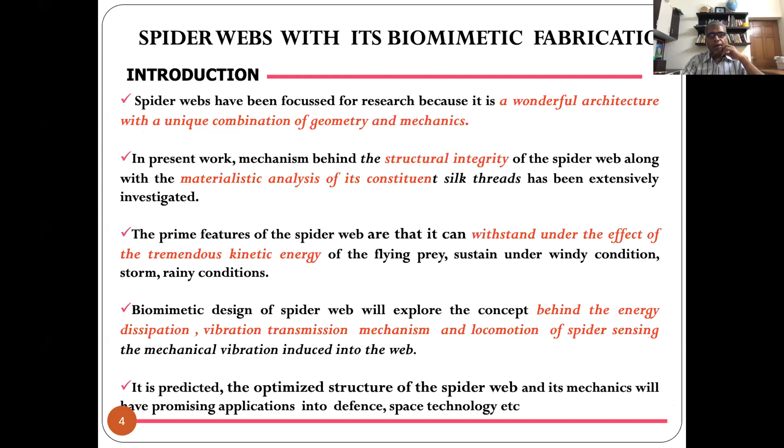It's very difficult to do through a machining process, or if we want to do it by some mechanical instrumentation. So that's the learning which we should have.

It seems that it is not very durable, but it is durable. If you see, in stormy conditions it survives, and even at high humidity it survives. It has some specific property - that's how it does it.

So what we have done is we do very simple experiments. We have taken the spider web on a glass sheet, and once you bring this glass sheet near the web, it automatically attaches because it has adhesive nature. Then you bring it to the lab and do some experimentation.

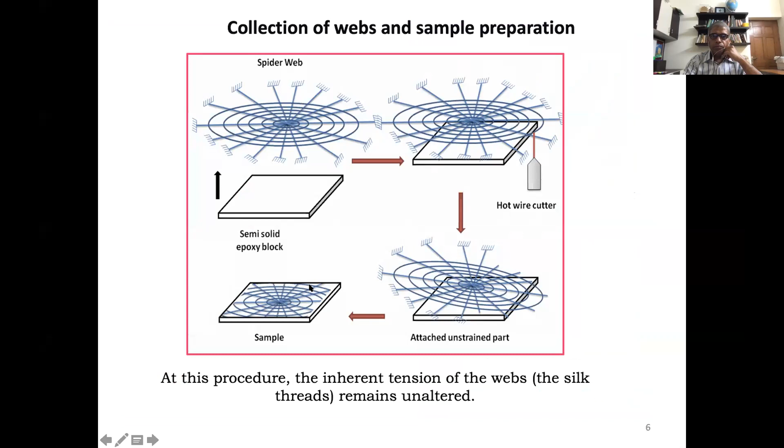Coming to what we have done next - this is a beautiful web that came up near our lab. We took our instrumentation there and tried to see how the characteristics of this web are sustained under windy conditions and extreme storms. So we put a laser spot on it - we have a laser vibrometer, which lets you measure the vibration of any structure using laser spots.

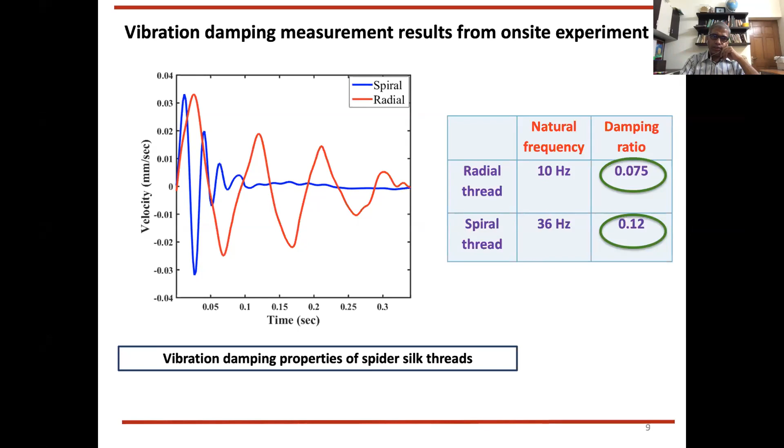When the insect strikes, it generally strikes this area on the spiral thread, because spiral threads are larger in number than the radial thread. So the spiral thread has higher damping but low strength, whereas the radial thread has higher strength but low damping. When the insect strikes on the web, it generally strikes the spiral thread because they are more in number, so the stretching or damping capability of the spiral thread needs to be high, and that's what came out from the experiment.

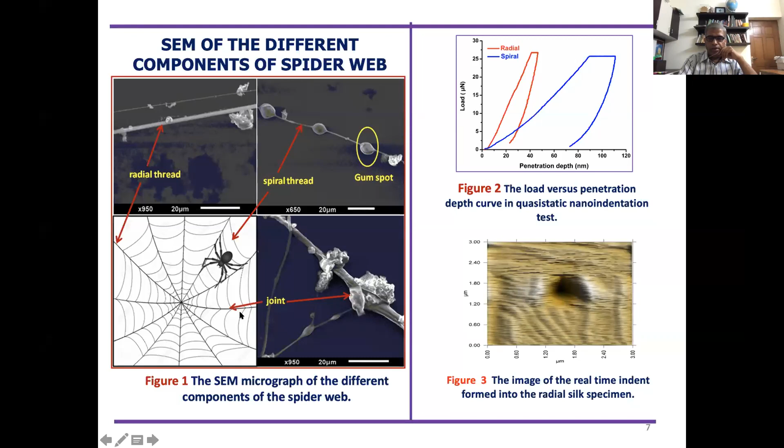So it means when she weaves it, she has those engineering fundamentals in mind - which thread should have higher strength and which should be low strength, which should have higher damping and which lower damping. She has been weaving it for thousands of years. But if we design an engineering structure like this, a flexible structure where we want more strength and higher damping, we can take inspiration from this web.

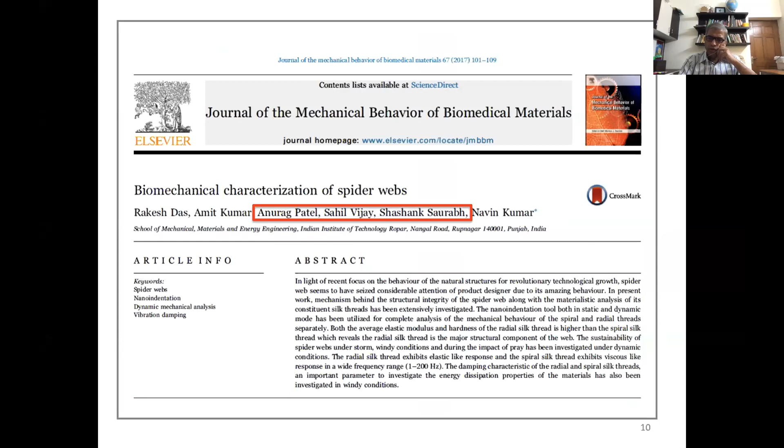You will not believe me, this all were done by my BTech students - Anurag, Vijay, Shashank. They did this study, and then one of my postdocs, Dr. Rakesh, wrote this paper, and we got a very good publication. So it is not true that BTech students cannot do good research - if you give them a simple task, they can do really good research too. Our work was published in some German magazines and in the media also.

Now, it's not only that the structure has such a beautiful engineering property. What's happening is that some spiders are blind, they cannot see. So how do they then catch the insect? They catch the insect through the vibration signal which gets transmitted when this insect strikes, the vibration signals are created and get transmitted.

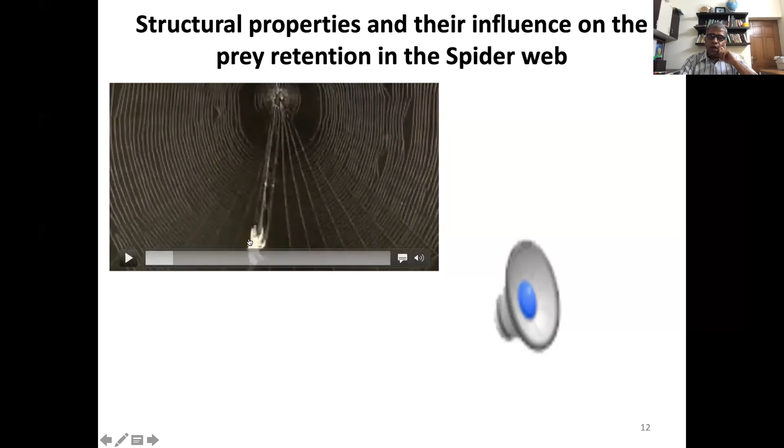So quickly, within a fraction of seconds, she grabbed the insect. I will show you how this vibration signal gets transmitted, how she gets that signal information, processes those signals, and locates the insect. You can see here also how quickly she goes there and catches the insect. But surprisingly, when we put a dead insect on the web, she did not respond - meaning she also senses the flickering of live insects.

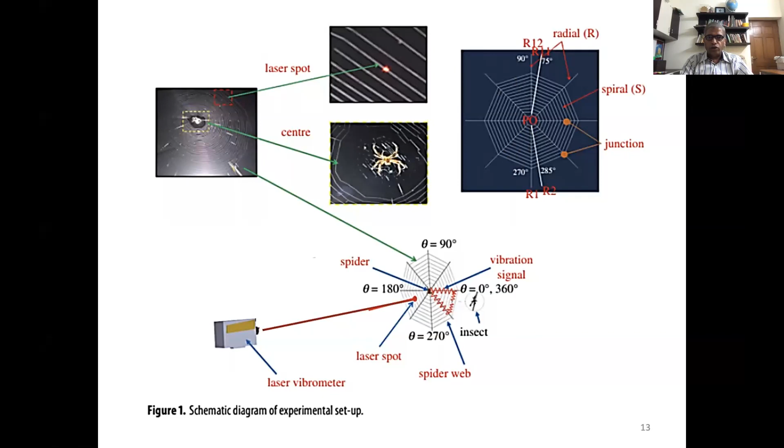So what we have done is put the laser vibrometer spot and tried to see the vibration response, the vibration transmissibility coming out from these spiral threads and radial threads. We want to see how these signals get transmitted from the spiral threads towards the center, since spiders generally sit in the center, so the transmissibility is important. We want to see how the signal gets transmitted from different threads, how she catches those signals, and knows the location relative to the spider. So here we have done the transmissibility at different junctions.

These are the junctions, these are the spiral, and we try to see how it gets transmitted. So you can see this, the vibration transmissibility ratio. Those BTech students who have done the vibration course know the vibration transmissibility is a very simple thing. So then we get to know how these signals get transmitted towards the center, and she catches those signals. And it is a very good study which conveys that she is catching these vibration signals and then locating the prey.

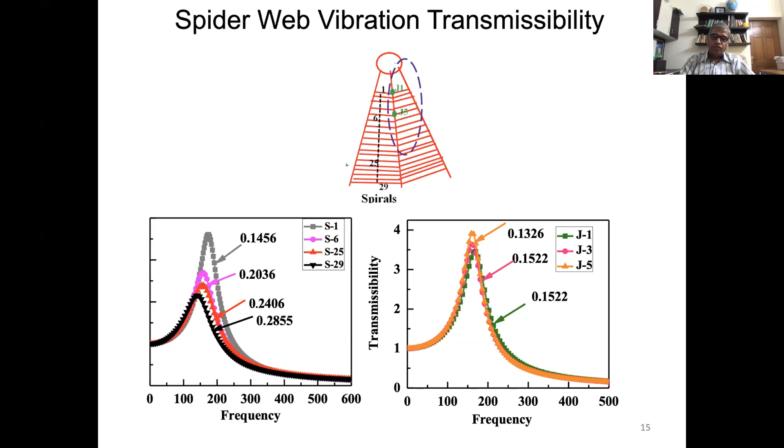It means somebody interested in the development of sensors has this inspiration, and people are working on the design of such types of sensors inspired by the spiral thread. I have seen 3-4 papers from other universities where people are working on this. We have published this work in the Philosophical Transactions of the Royal Society A, which is the oldest journal in the history of the English-speaking world. Newton published his paper in this journal. So this is a very reputed journal, about 200 or 300 years old.

Now, again, I am coming to another insect, the honeybee and wasp. They have the stinger. So what is the stinger? This back channel which she bites with when she is threatened. So when she is threatened or feels that an attack is there, she takes out this stinger and she bites. During the biting she inserts the venom in the prey, and this inserting mechanism is a beautiful mechanism. How she does it, we will show you.

So this stinger which I have shown is about 2 or 3 mm. We have done the CT scan of it to see the internal structure. Figure A shows the CT scan of the full stinger. The initial 2 figures are the CT scan of the full stinger, and the second figure shows the inside, because with a CT scan you can get the inside view also. So here we have seen that there are guide rails, lancet-type things, on which the upper structure is sliding.

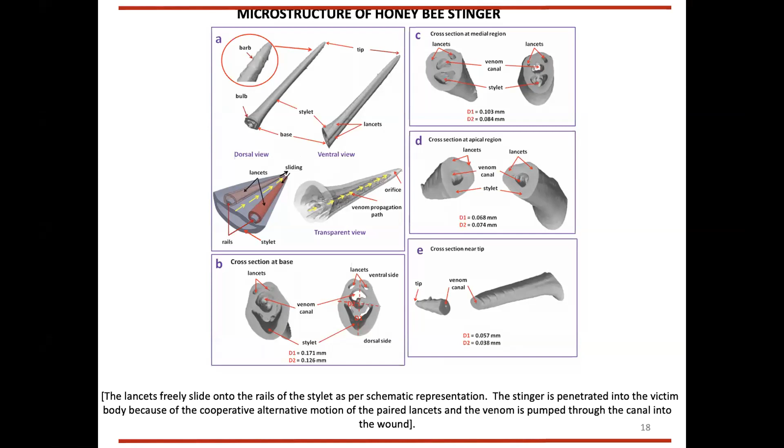So when prey is coming near to her, she slides the upper portion on this lower portion on this guide rail, and there is a sac of venom here. Because of this sliding motion, a negative pressure develops here, and the venom goes inside the prey through this channel, micro channels. So you can see this micro channel and orifice. It is opened and that is inserted in the prey. So this mechanism of inserting the venom in the prey is a very beautiful mechanism.

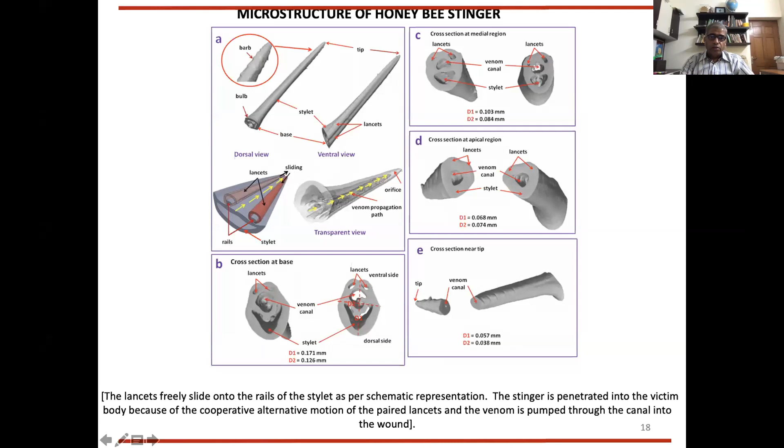But of course the prey or the person they bite feels the pain. Pain is not because of the penetration. Pain is because this venom gets inserted, which creates a lot of pain in the prey or in the person they bite. So this insertion mechanism is very interesting and gives inspiration. Then we have looked at the properties. It is not a uniformly distributed structure. It has a lower modulus at the tip than at the base, which makes sense because you don't need so much high strength at the tip.

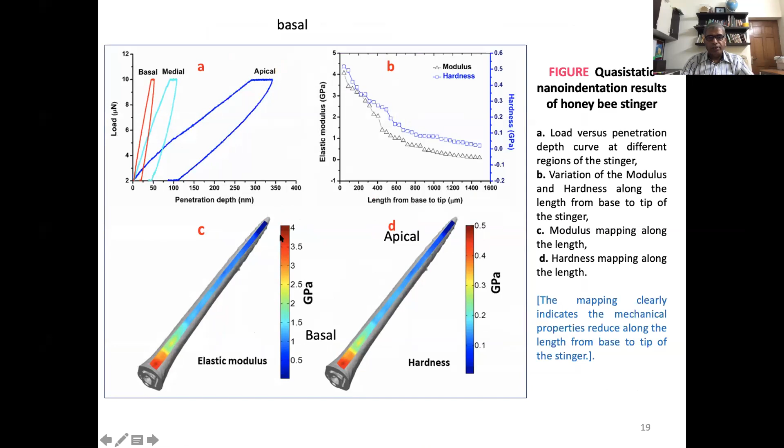One more thing we have investigated is that when they penetrate or bite, they put a particular angle from the vertical. They put near about a 6-degree angle from the vertical to bite or insert the stinger. Why do they do it? We have shown different figures here, 90 degree, 45 degree. Biologists have conveyed that they put this angle, but what the angle is and why they put it, they have not conveyed. So when we were doing the literature survey, we tried to see why they are putting it.

We have done the finite element simulation and seen the stresses coming on this stinger. We find that the lowest stresses come when this angle is about 6 degree or 10 degree. Within 10 degrees, the stinger gets the minimum stresses on its surfaces or structure. It means, as those biologists were saying, they create a small angle from the vertical to bite because they get the maximum forces through this angle and their stinger will not break. So these insects are doing it.

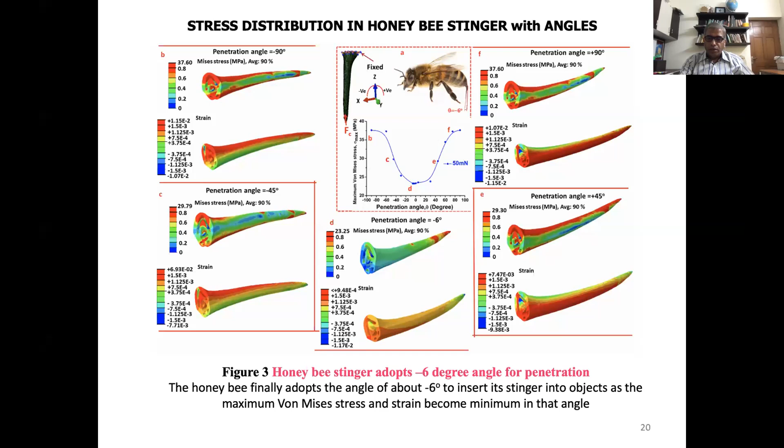There is an engineering concept behind it, and we also used that. So we have proposed this. We have filed the patent for this: the bioinspired micro syringe needle for drug delivery.

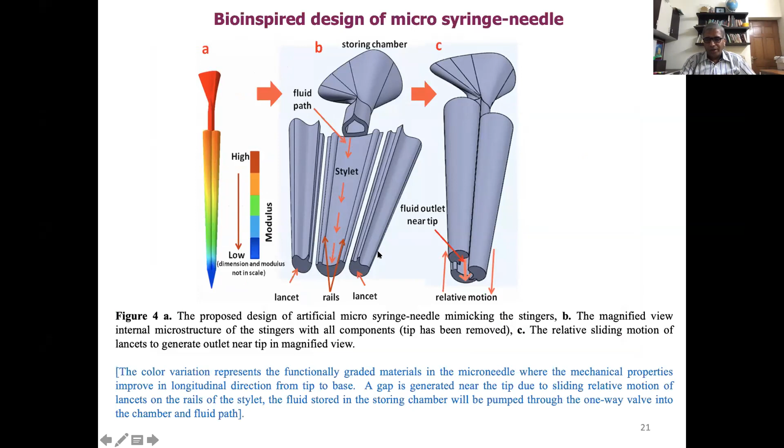So here what we have proposed is there is a simple sac, and the drug is pre-filled, and then you just slide this upper portion, and the drug can be released in the patient. So that's the concept, which is inspired by nature. So here we got this Nature Scientific Reports publication, where this work was talked about.

So now coming to one more work which we have done, on the painless piercing of the mosquito. All people have found that a mosquito bites without pain. So how do they bite? They have so many beautiful capabilities. They have a CO2 sensor. They locate your arteries or veins, the blood vessels, and they also have a numbing agent. They put a little bit so that you don't feel the pain. These are all reported in the literature.

But they also do a little bit of vibration of very low frequency, say 5 Hertz, when they are penetrating. These combined effects make it so beautiful that you do not feel the pain. And how this is happening, I will show you. So this is the proboscis which goes inside. This is the hollow structure which gets pierced, which is known as the labrum, and it has a hollow tube. When they suck the blood, it goes through this tip. Now you can see how it bites.

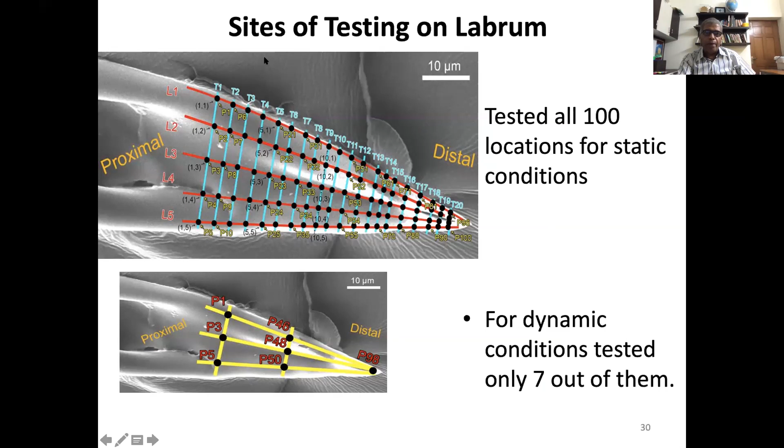And also we have done the dynamic test on this. Here we have done the quasi-static, and here the dynamic, because this labrum is a vibrating structure, so you should know the dynamic property also. Then we have taken all the results of this indentation test, meaning we got the modulus and hardness at each point, and then we mapped it, or summarized the property at all these points.

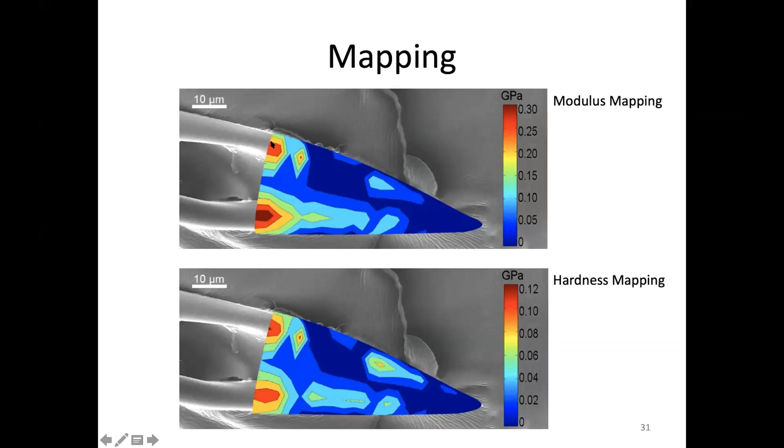So you can see that the modulus is not very high at the tip, which is contrary to our belief. We were thinking it would be high, but it is high at the distal end, right? So why is this happening? We repeated this experiment so many times. We thought this is not correct; the tip should be hard. But every time we got this result, and then we saw that the ends are like corrugated. They are folded at the edges.

This is because during penetration it needs sufficient stiffness so that it does not bend. So these ends are a little harder, higher strength than the tip, and the tip strength is sufficient, about 0.02 or 0.03 gigapascal, which is more than the modulus of the skin, but sufficient to just penetrate. But during penetration it should not bend. So they have this corrugated structure with very high strength, and that's why it is not bending.

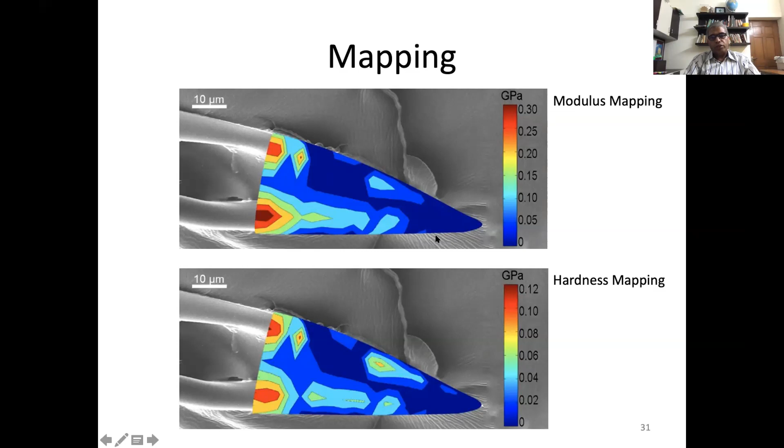It's the same thing if you fold a paper and then try to bend it: it is difficult to bend because you are increasing the stiffness by corrugation or folding. The same principle is here; nature has followed the same principle. It is a curved or folded structure here, which gives it more strength, and that's why it's not bending. And also they keep vibrating at different frequencies. At low frequency, we have checked 5 to 10 hertz.

So you can see that they keep on changing its modulus, so that whenever they need higher modulus, they can tune it a little bit, so that they can get the sufficient strength. So that's why they are vibrating it.

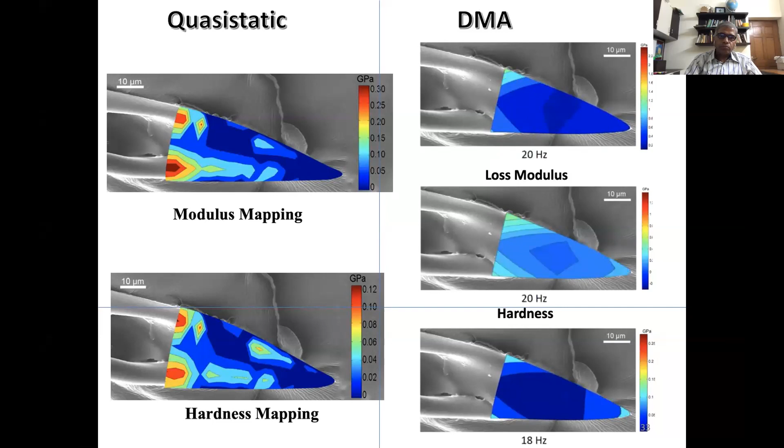Again, this work is by one of my BTech students who has now completed the PhD at Ohio State with Professor Bharat Bhushan. We have done this work and we have filed this patent. So you can see the bioinspired needle, micro needle. This is used to take out the blood.

Earlier, we have given you the inspiration from nature about the honeybee, which is used for drug delivery. But here, you can take out the blood through this system. So it is not uniform; a material gradient should be there. There should be some low frequency vibration.

And that can be done by taking the inspiration, and the material strength may not be needed. At present we have the metallic needle, stainless steel or different materials, but which is not needed at all. You can have a very soft material and it can penetrate if you have that frequency of vibration. So that's what nature is doing. People are working on it, and we are also working on it and planned a lot of things for it.

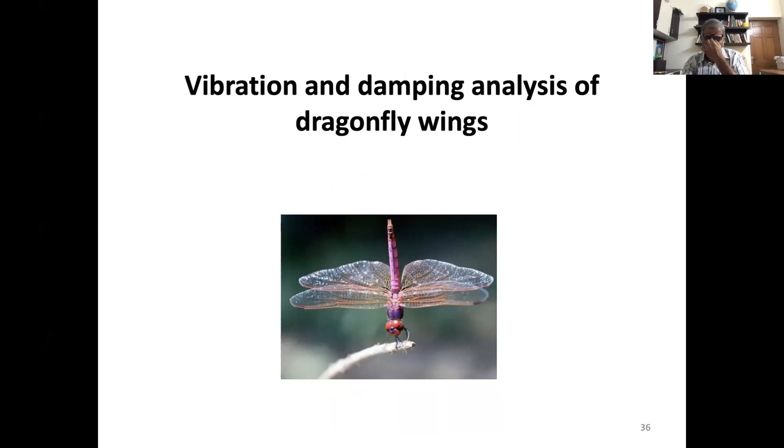So now the dragonflies, for micro air vehicles. People are working on it because now the drones are of micro size, so that they can spy on the enemy. They can enter the room by the windows or by the doors. So a lot of applications are coming, because in nature, this dragonfly has the unique capability.

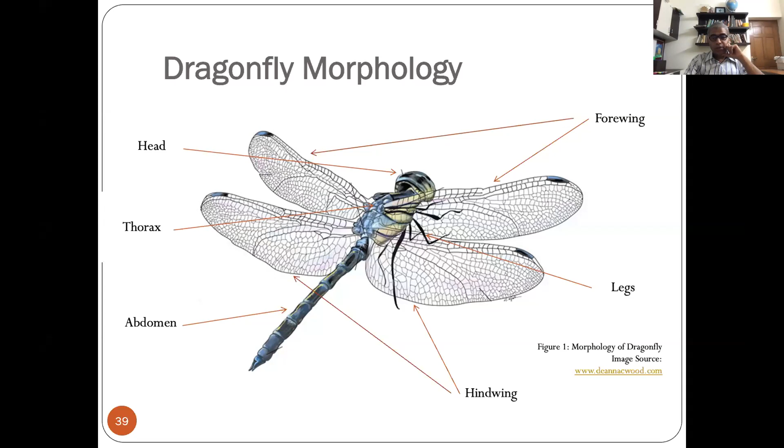If you have seen them, they can suddenly turn around. They can take a 180 degree turn. They can change the altitude at different velocities, and they have very high velocity also. So that's where the inspiration came from.

People are working on it. So what we have done is we tried to see, when the dragonfly flaps its wings, how the strains are coming on the wings, because wing design is a very crucial element in micro air vehicle design. People are taking inspiration from the dragonfly, but we should know how the dragonfly's wings have those capabilities or those properties.

So here we are showing these different modes. What is a mode? When anything vibrates or moves, it has a particular shape. These are known as mode shapes, and we are showing you the different modes. We have taken high-speed cameras and done these experiments. These are all our experimental work.

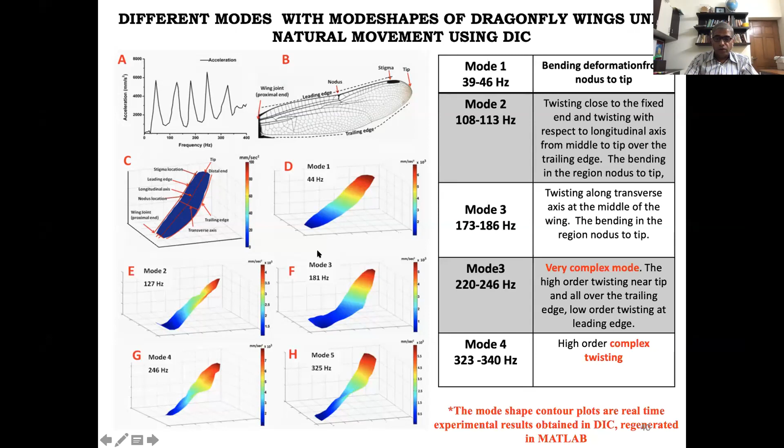So we have got different modes, and then we also got the strain distribution on these modes, so that we can know where the maximum strains are coming on these wings, so that the failure chances of wings would be less. And if you want to attach some sensor on these wings, you can do that also. So these are the strain distributions. The first mode is the bending mode, so clearly at the base the strain will be maximum, which is coming out through this experimental work.

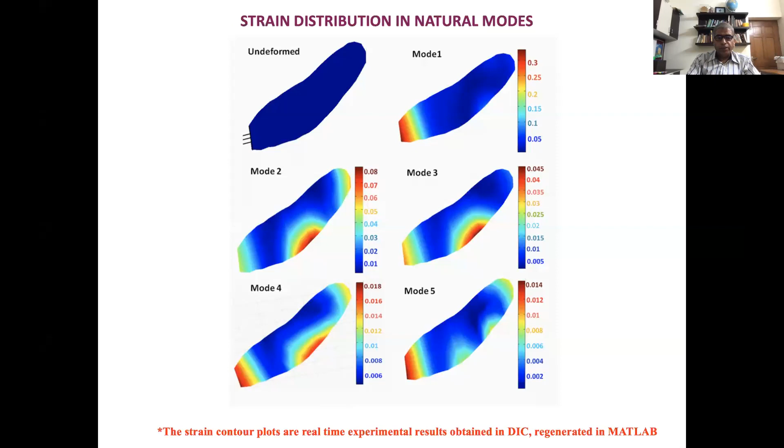The second mode was the twisting mode, so at the edge the strain is coming out maximum. The third mode was also a twisting mode. The fourth and fifth modes are complex modes, which are a mix of bending and twisting. So here we are plotting the strain distribution on the wings, so that inspiration can come up and wings can be designed for micro air vehicles. Again, we have published this paper in the Philosophical Transactions of the Royal Society.

Now, one more work which is related to human fingernails. Can we check the human fingernail of the diabetic patient? Can we take the nail sample and convey that this patient is diabetic? So we have done a lot of sample collection. We worked with the hospitals, and we have collected hundreds of samples.

And then we came out with, yes, we can give the indication of diabetes, even the progression of diabetes, through this nail. What is happening is there is advanced glycation end product deposition on the human nail. If you do mechanical testing and biochemical testing, you can find out those differences. And we have shown in this work that the nail also conveys whether this patient is diabetic or not. And again, this work we have published.

And then we are working on bone strength. Why are we working on bone strength? This is the work. I will show you very small work, because I think my time is about to be over.

So how much time do I have? Another 2-3 minutes, I think. Or over.

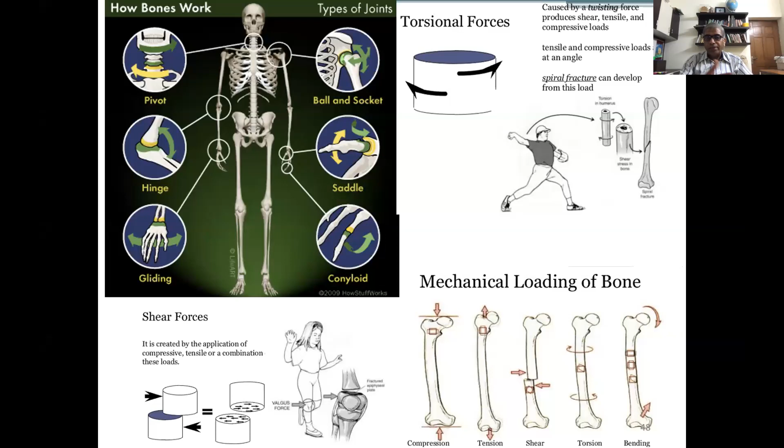See the loading condition when we throw a ball: all these loading conditions act simultaneously, the axial load, the tangential load, the shear deformation, which is even more complex than in a machine. But unfortunately, we do not give these examples. With normal loading, the failure chances are low, but with abnormal loading, the chances of failure are very high, in particular hip fracture. This is a very serious concern. Once hip fracture happens in old age, the mortality is very high. The survival rate is less, right?

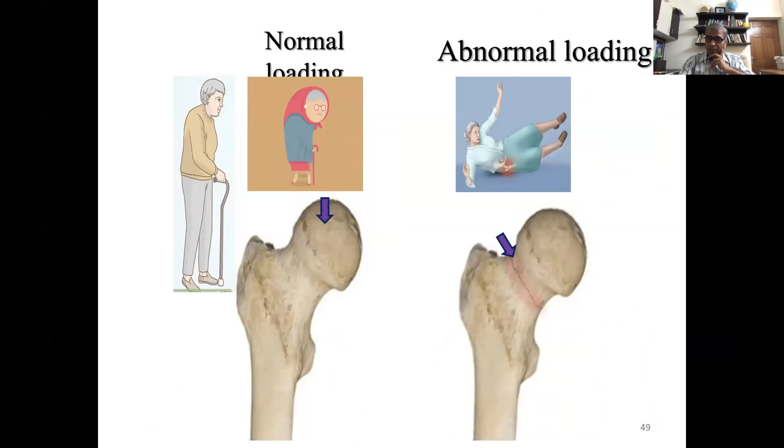The clinicians have one tool to measure bone strength, whether your bone is good or not: DEXA. It's an X-ray based technique, but it has limitations. Clinicians always complain that DEXA does not give a clear indication of bone quality. So what we have done is two more investigations. We have done CT scans of those bone samples, and we have measured the bone strength or bone modulus. You can measure it using any mechanical system.

You can see that these two patients have the same DEXA T-score, minus 2.9 and minus 2.9. But if you see the CT scan, the last patient's bone is more fragile than the first patient's, even though they have the same DEXA.

And when we have done this mechanical testing and found out the modulus, we were surprised to see that this bone, even though the DEXA is saying that its bone is not good, DEXA is minus 2.9. And here it is even lower, minus 4.2. But if you see the strength and the CT scan or the volume fraction, it is giving a clear indication that this bone is much better than this bone, right? Which DEXA cannot differentiate.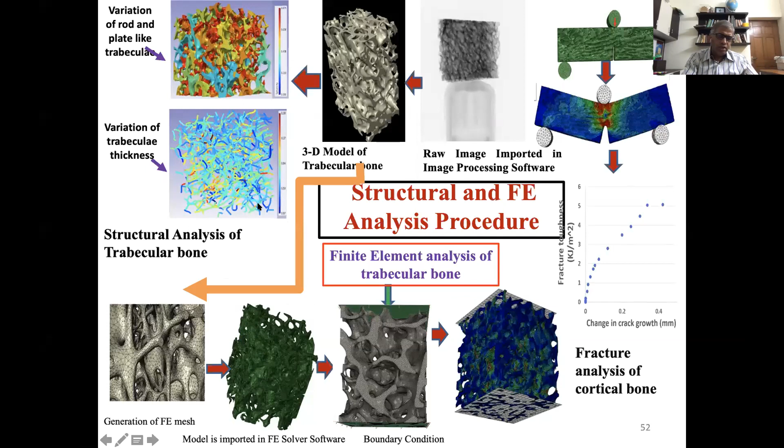So we are doing a lot of modeling, simulations, investigation of the bone, and try to see how we can help these clinicians, how this crack is propagating, and then how these implants can be designed. So all this information is really very helpful to these clinicians.

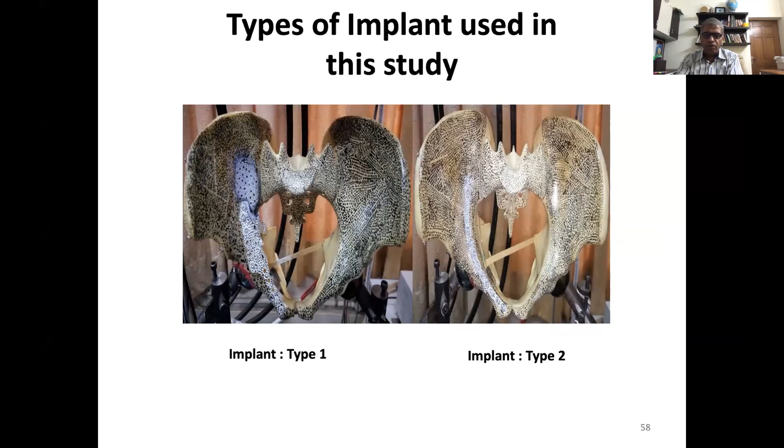You can see the two implants: this is the conventional implant type 1, which is used, but this is the new implant which is designed by the clinician, and we are testing it. So there's a lot of scope of working in this area, and we have a lot of things which can be designed or have the inspiration. Then we have this high strain deformation. And then beyond the soft tissue, we are working on this, right?

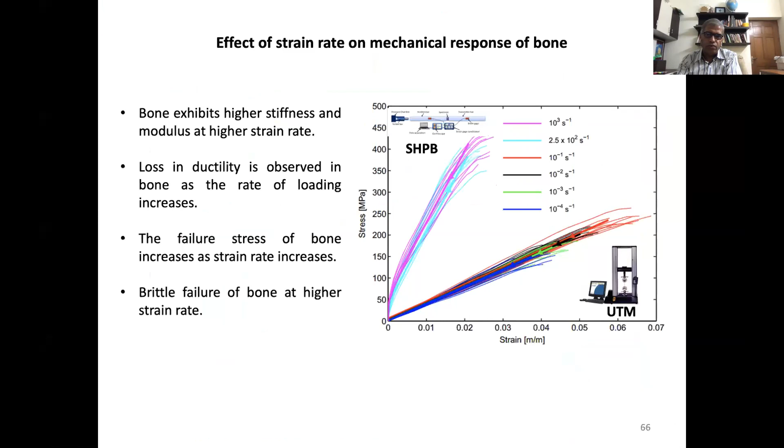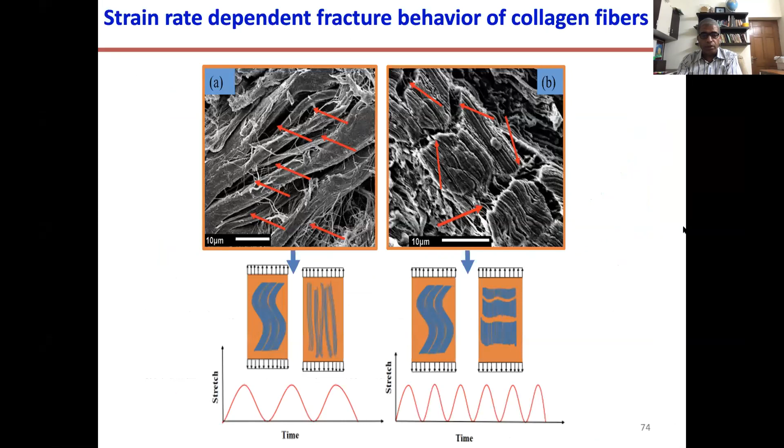So what I'm saying is there is a lot of inspiration you can take in designing engineering tools, devices or instrumentation, even from natural things, right?

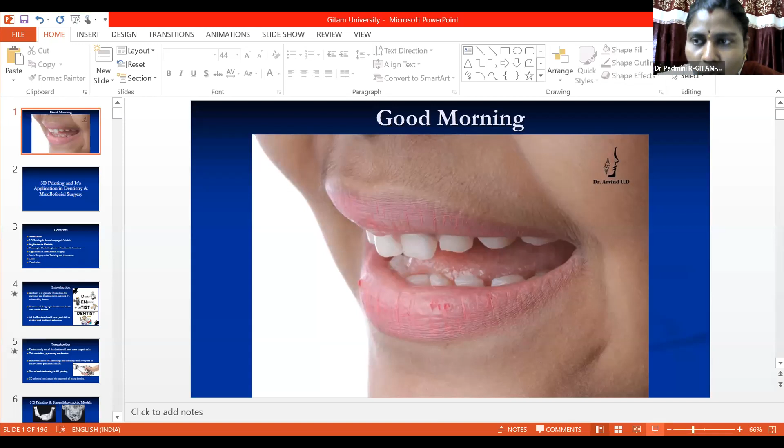Thank you very much, ma'am. So I'm just checking out whether I'm audible. Yes, sir, you're audible. I'm just turning off my screen because it's actually coming in between my presentation.

Thank you very much for the generous introduction, Surendra Garu. First of all, I'd like to thank GITAM University and Balla Sudhir Garu for giving me this opportunity to speak in front of you and share my knowledge about what I've been doing in dentistry with the technology of 3D printing. I thought it would be apt to say good afternoon, but it's still good morning since we are 10 minutes ahead. So, very good morning. Today my topic for presentation is 3D printing and its application in dentistry and maxillofacial surgery.

Most of the time we start off with the contents, but I would like to say something about dentistry first in the introduction. Dentistry is a specialty which deals with the diagnosis and treatment of the teeth and its surrounding tissues. This is not a formal definition, but a layman's term so that everyone can get adapted to this field. What dentistry actually is, is an art and science, where a dentist has to be a doctor, an engineer, and an artist. Only if he successfully does all three jobs is he a true dentist. So all dentists should always have very good skill to obtain good treatment outcomes.

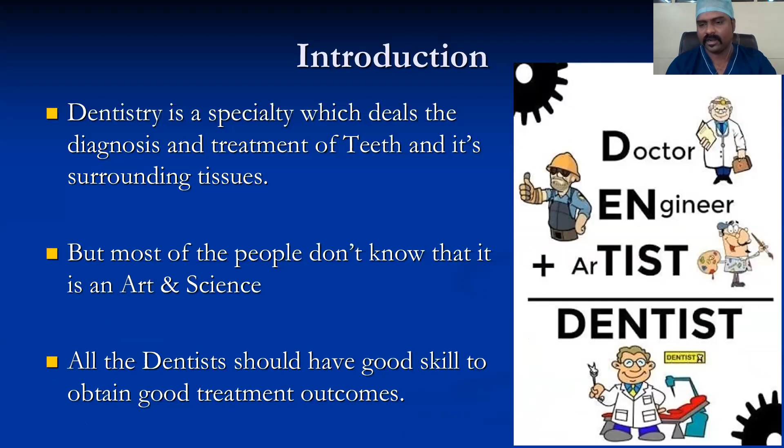Unfortunately, not all dentists will have the same surgical skill.